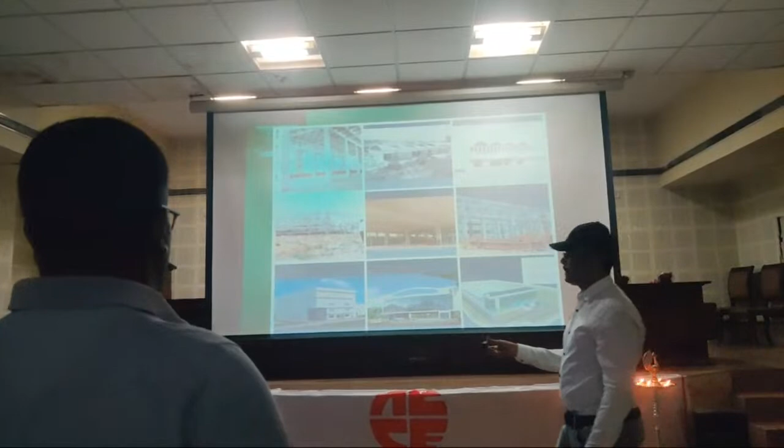Hello everybody, good morning to all of you. At the outset, I am carried away by this Kakinada Center.

Actually, I am one of the founders of this ACCE, and I could never have imagined in 1985, when we formed this association, that we would have such luminary centers all over India, consisting of so many people who are luminaries. So first I'd like to pay a salute to whoever coined this center and merged it with ACCE. Welcome to ACCE.

A word about how ACCE was formed: there was a Gangaram building collapse which happened in '83 in Bangalore, and 9 of us joined together. Most of the time, I feel all of you should also do this - when there is a failure, make your own investigation. 3, 4, 5 people just get together, not to find fault with what has been done, but to take lessons from what has happened and come back and share it with everybody. Because it is not a question of one being superior or inferior, but the whole fraternity getting a bad name.

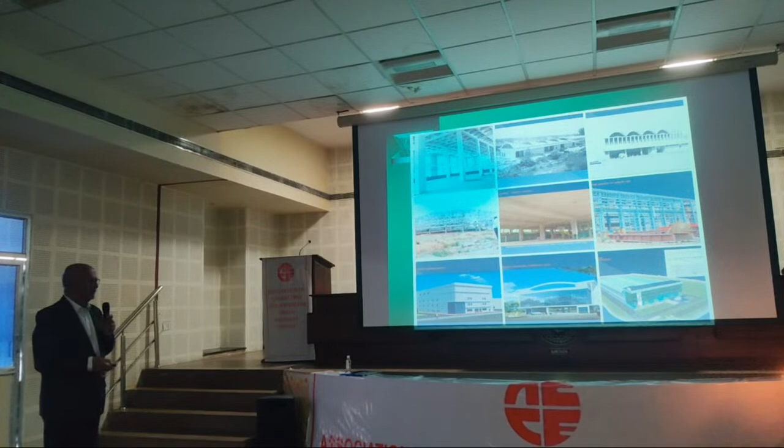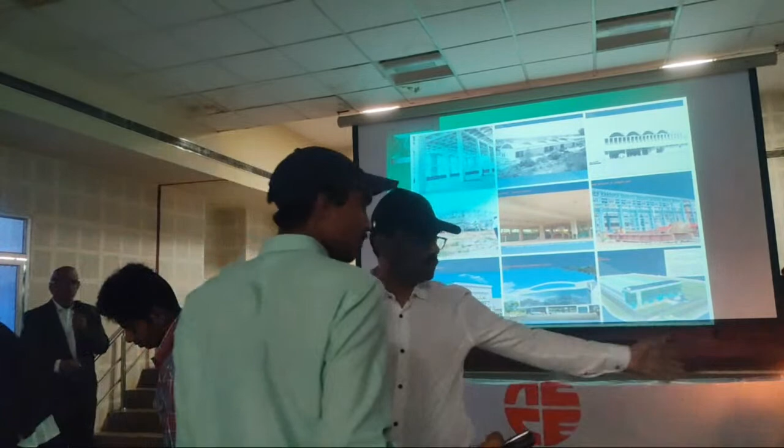This is the powerhouse that I did for Almatti Dam people. This is an industrial building with high, heavy-duty racks, 8 meter high, 10 meter high, etc. for an MNC company - this is a factory for Jyoti Laboratories. They had built 5 factories before, and they came to me that I had to just repeat one of those factories in Bangalore. I told them I don't repeat - I will be starting from scratch as though I have not seen any of your 5 buildings, and then I will do it. And I did this job, and later it was told by the chairman that I have done it to international standard. But imagine how much work I might have done.

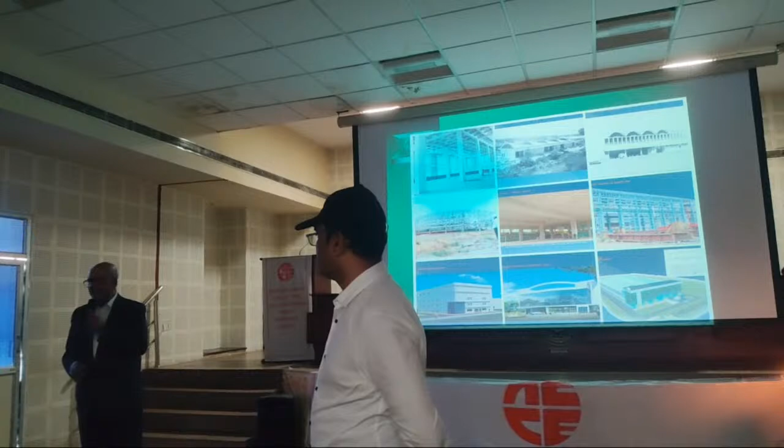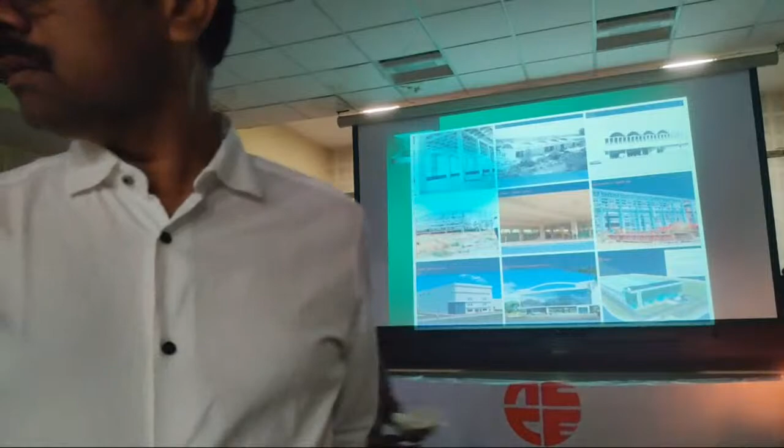So all of you have to do work, and there is a saying, if you want me to tell you, that in the 21st century, to be where you are, you have to keep running. To be where you are itself, you have to keep running, let alone taking it forward.

Okay, I will just run through my program a little fast because I have to cover a lot of subjects. So whoever is having anything to say, we'll say it in the end. You can ask me any question.

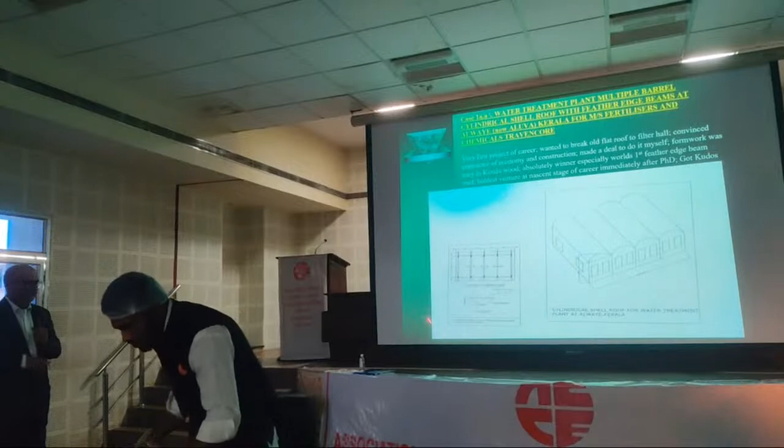So now I come to the point where the innovation came. Here is the innovation. This is a curve, can you see it in the end? Yeah, okay, this is one shell. These are all curved shells. This beam, all these beams, would have been very deep, 4 feet, 5 feet deep. So what I did, I had studied this in shells, that when the curve comes like that, this part can be the beam. So I put this particular feather edge beam, cylindrical shell for a water treatment plant, with feather edge beam.

This was the very first project of my career, wanting to break old flat roofs with a filter hall, convincing the contractor of the economy of construction, and making a deal to do it myself. Formwork was easy in Kerala, and in Kerala wood is in their blood, they know what to do with wood. So I told them the formwork can be made in wood easily, and he agreed. Most people agreed, absolutely a winner, especially the world's first feather edge roof.

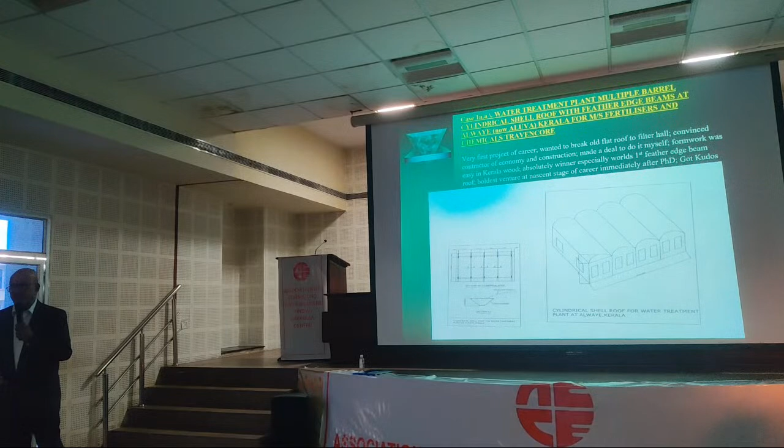Then I was told this was all in theory in the books, had not been done anywhere in the world. There's a theory, somebody had done research that it can be a feather edge. So I told my professor who taught me shells, and asked him, is it that I'm the first person to do it, or are we the first persons? He said, I think so. So that's why it came to be maybe the boldest venture at the nascent stage of my career, immediately after my PhD.

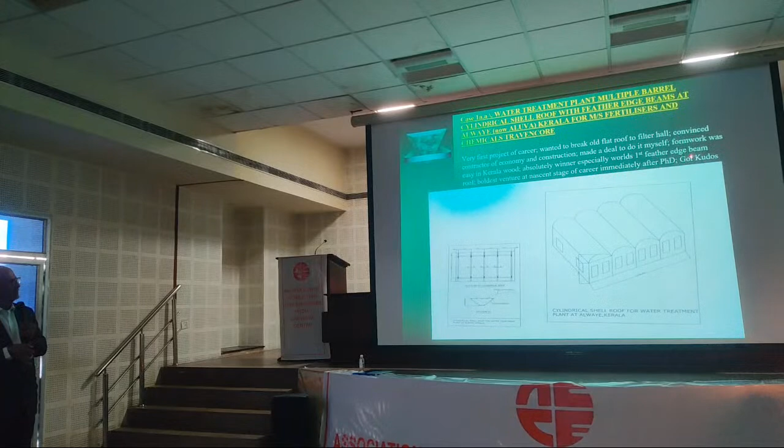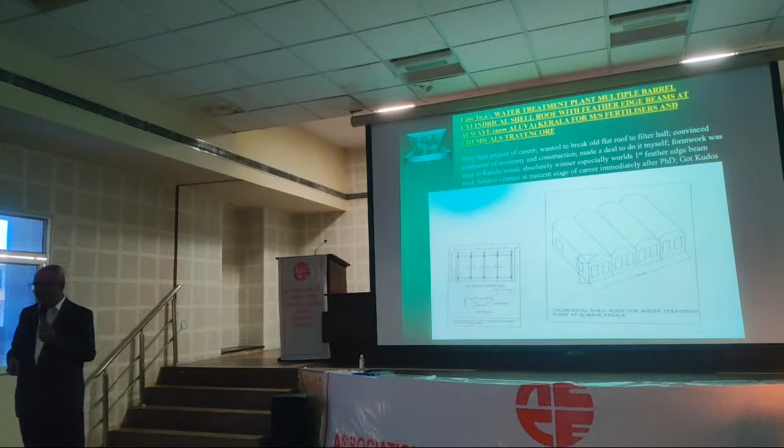So you see, the thing is the boldness. I'm telling you all this because many people are working on different projects. That boldness you must have. It's not that you bluff people, but you have the boldness. Go to libraries, study all that, then be ready for whatever it is, and improve efficiency from 50% to maybe 75%, then you take up all this. Otherwise, you will not be able to do this.

That was the first shell, and it was in 1988 or something. It is the confidence level you have. Yeah, not only confidence, it's all teamwork. See, you know better about formwork, I know better about design, he knows better about architecture, something like that. All of us put together: what he doesn't know, I try to make up; what you don't know, I try to make up. Don't say I did it, we did it. It's that sort of situation.

Now, this is avoidable bad experience. When I did the project, I had a lot of bad experiences. I'll just go through that for the benefit of all of you. See, the site group was not bothered about reading the important aspects of construction given in drawings, such as centering schedule, concreting schedule, and decentering schedule, which would have been calamitous. See, I issued the centering schedule, then I gave the concreting schedule. In those days I was really efficient. That's why I said we are 35%. I gave all of that in drawings.

And the people at the site said, is this all required? What is this concreting schedule? Why do you need it to put concrete? Just pour from the bottom and go to the top. I said, my God, you are at a different level. You better follow this. You have to be strict. You can't be lenient and say, do chalta hai, do whatever. You have to be strict. No, you better follow this, or I'm leaving this site and going. You've got to be that way.

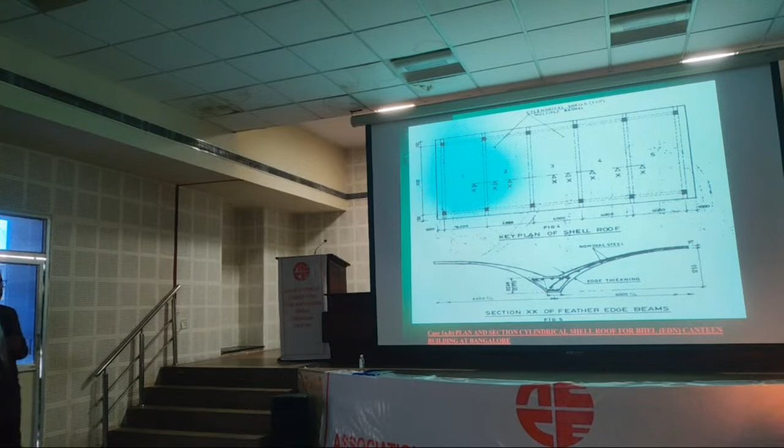Yeah, and there is that, again, feather edge beam, and we have done things like that. So, okay. Now comes, after this, don't get bored of shells, because they told me one part should be on shells particularly. So I put everything on shells in one part. You'll get other interesting things after. This is not interesting to you.

But remember that there is something called funicular shell. Okay? I don't know how many of you know this. So when I went to SERC in Chennai for a seminar, I heard what research they're doing. They have contemporary trends, no? They told me that they're doing some research on funicular shell. I said, Professor G.S. Ramaswamy, he was the man who initiated this thing, funicular shell.

Because funicular shell is the reverse of a catenary. A catenary is the shape of a rope. If you let it hang, it will be totally in tension. If you invert it, it will be totally in compression. So they devised this funicular shell to be totally in compression. So they said it can be done, because this is an Indian, what shall we say, patent. Okay?

So then it was proposed to construct a large multi-storey stores complex in BHEL, a central stores complex. At the concept stage, we discussed what could be done differently. I said it's a large area, flat roof, on a 7.5 meter by 7.5 meter grid or something. What are we doing? Simply pouring concrete left, right, center and using a lot of steel? Why not do something different? What can be done? Each bay you can take a funicular shell.

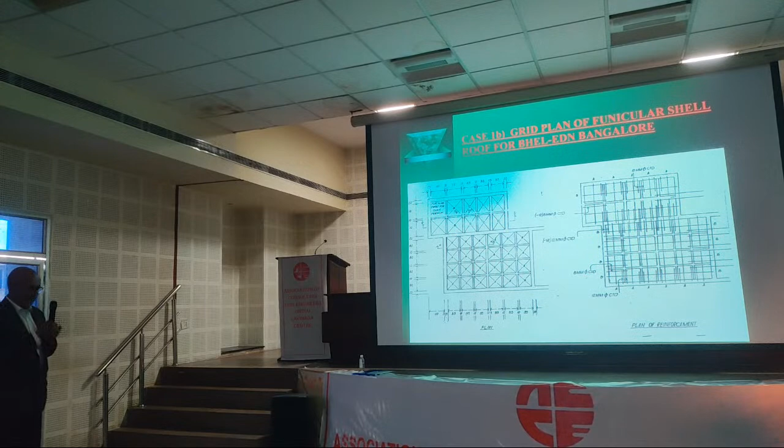This is the plan. These are all individual funicular shells, and that's the beam grid. There you see the beam, the lateral beam. These are the columns, 7.5 meters. And you see the amount of concrete that you have to pour. This is only 25 mm thick on top. This is the skin reinforcement, and wherever there were cranes, I put a double layer. I'm just showing it so that you will understand how easy or how difficult it was.

Now come to the test part. They wanted a test, and they said you should be here the whole day during the test. Those were the conditions they put. We offered a testing apparatus. No, we want you to be testing. I said, okay. So we put masonry all around, put the shell there, and put sandbags on top.

All the officers and staff of BHEL would not come below this. They were all standing 50 feet away, thinking it's going to collapse on their heads. And me and my assistant were going below it, trying to see what the cracking load is, when the shell would crack. So those fellows said, you fellows have got guts.

Your heart is very strong. You won't come in the bottom. Then 100. We were supposed to test, as per IS, 25% more. Then 125% is what it's supposed to take. I said, don't stop, I want failure. So we went on and on and on.

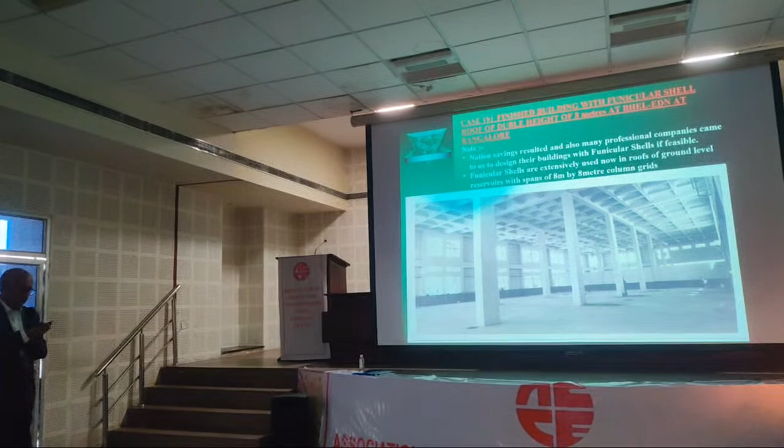Funicular shells are extensively used now in roofs of ground level reservoirs in spans of 8 meter by 8 meter column grids. I don't know whether people notice, who do underground tanks and things like that. When it comes to the roof, we all do funicular shells. 8 meter by 8 meter span, not 1.2 meter, 8 meter. So that's the way it was. Okay, those are the two shells on the paper. The last one is the conoid shell which I presented.

I don't know how I'm doing on my time. So let me give you a little warning. After I think two panels, I will stop. I will give the presentation continually. Shells are finishing up. This is a conoid shell.

So then we got a spares module, stores module in Wheel and Axle plant, now called Rail Wheel plant, in Bangalore. So then they said, what can you do? I said, we can put a Northlight conoid shell. Then the general manager there was actually from IISc. So he turned over and said, this guy knows what he's talking about. So that was a bonus for me. Then he said, is it suitable? I said, yeah, why not?

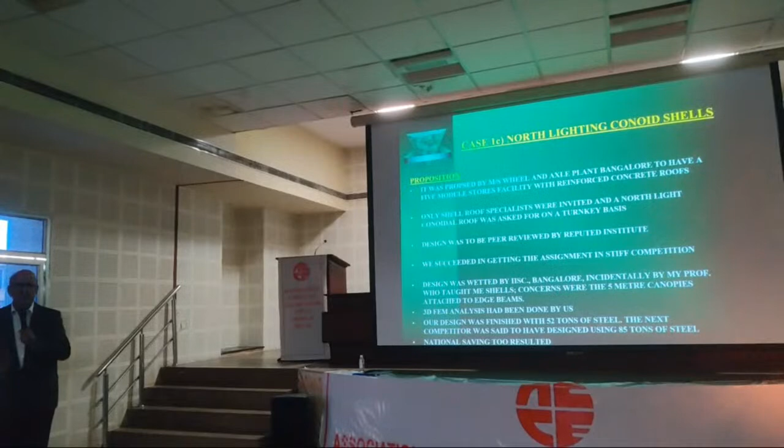So it was proposed by Wheel and Axle plant to have a 5-module stores facility with reinforced concrete roofs, all flat. And then they had 5-meter cantilevers, or canopies, combined with it. Only shell roof specialists were invited, and a Northlight conoidal shell was asked for on a turnkey basis. Because I had shown them this Northlight conoidal shell photograph, they told other consultants, we want Northlight conoidal shell. So another fellow took boldness and quoted for that, and I got the job.

Design was to be peer reviewed by a reputed institute, and here comes the thing. So they say it has to be peer reviewed by IISc or IIT and all that. I said, I have no problem. We'll do it at IISc. And whom do I go to? The professor who taught me shells. He is going to approve my shell roof. So he turned around and said, oh, you are a bold chap. You have a 5-meter cantilever canopy coupled to the stiffening edge. How is it possible? Sir, I have done finite element analysis of the whole thing.

I have done 3D. Sir, the 5 meter was also included in all the analysis. The edge beams have all been checked for that. Told in Kannada, convince them about it. I don't know whether you know Kannada. You say something and convince everybody. My own professor, I said, sir, you taught me shells, but I am telling you that I have done it. If anything is wrong, you tell me. He referred it to the finite element group, and they said, this is fine.

There's no problem. Then he said, the edge beam of the shell will have some effect on the shell. What have you done for that? Sir, even beyond finite element, what do you want? I've done finite element with the shell, with the edge beam and with the canopy. Then I was just thinking, I said, if you want, I'll thicken the shell at the bottom, such that the edge disturbance won't be there.

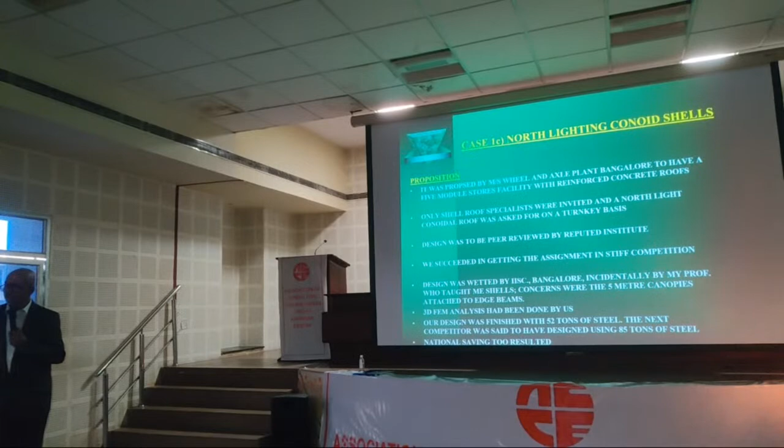Then they put a condition in the work award. They said 52 tons of steel must be used. If anything more is to be used, you have to pay from your pocket. Anything less used, you have to give back to Wheel and Axle. I said, what sort of contract is this? And they said, sir, our auditors are insisting because somebody is telling them it needs 85 tons of steel.

I was shocked to see somebody designing with 85 tons of steel. In fact, I had got 49, and I had made it 52. I said, okay, 5% more. So why should we give back steel to those people? And we got the job. National saving is the result. What's the net result? From 85 tons, the job was finished in 52 tons. So, that was the north light shell.

This is the shell roof with the north lighting. There you go. That's a beautiful module that we did. And you can see the 5-meter canopies on both sides, because this is stores.

Now, for the people who want to work on shells, you may say Ram Prakash said shells can be done, but don't start getting into shells immediately. That's something you should keep in mind. I'll just put it such that it will be useful for you. Okay, what's the definition of a shell?

Singly or doubly curved, thick shell or thin shell. If you make the shell too thick, you have to take the thick shell theory; the thin shell theory will not do. An example of a singly curved shell is the cylindrical shell. Doubly curved is the hyperbolic paraboloid. Simpler forms are made using straight line generators. Ease and saving of formwork is the key. The major thing is the formwork. Analysis varies with use of membrane theory as well as bending theories. An efficient structural form due to its geometry.

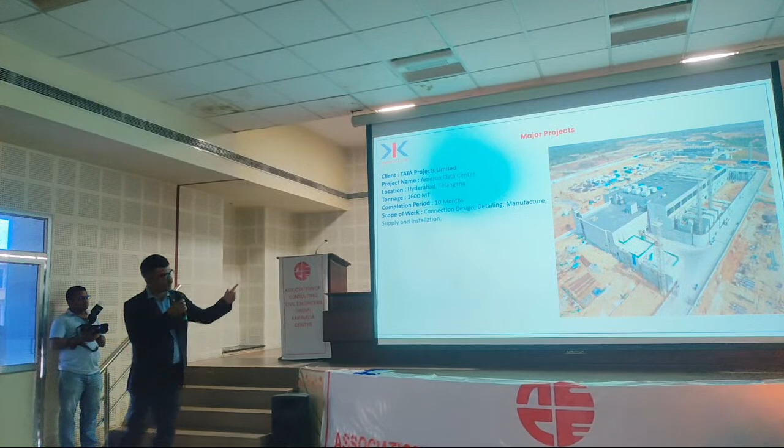This is for Amazon data center, done through Tata Projects Limited. It is nearly 1,600 metric tons. We did this project during the second wave of COVID and completed it within 10 months. It is one of the milestone projects for us.

This is for Aparna Infra Housing Limited, done at Trian roof, approximately 800 tons. This is for Rain Carbon in Vizag, a 400 ton building, completed within 4 months.

This is for Eastern Film Tech, which makes polyfilms. This project is 2,100 tons, completed in 11 months, even including the second wave of COVID. And this other one is 350 tons, completed in 4 months.

This is for Procter and Gamble, approximately 150 tons, completed in 4 months.

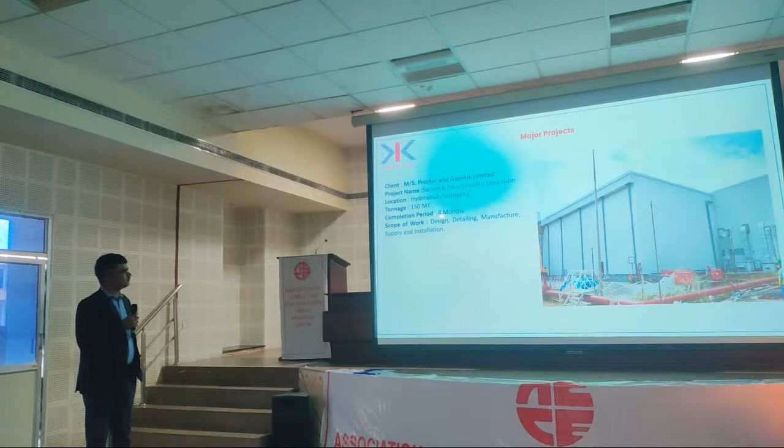This is for Chiripal Polyfilms Limited, which is 250 tons. We completed this in Hyderabad in the record period of 5 months.

This is for Vijay Polyplast, 380 tons, completed in 4 months. This is for NCC Crowns, 350 tons.

This is a library building we did in Jamshedpur for Manipal Tata Medical College, through Tata Steel.

This is one modern rice mill, which is 100 tons. We completed this in 2 to 3 months time.

This is for Rythu Vedika, for the Government of Telangana. We built 252 buildings of 10 metric tons each, erected across the state of Telangana within a span of 3 months.

And this is for Vedaganga Seeds, a 100 ton project.

This is for Tata Advanced Systems Limited in Hyderabad, which is 200 tons.

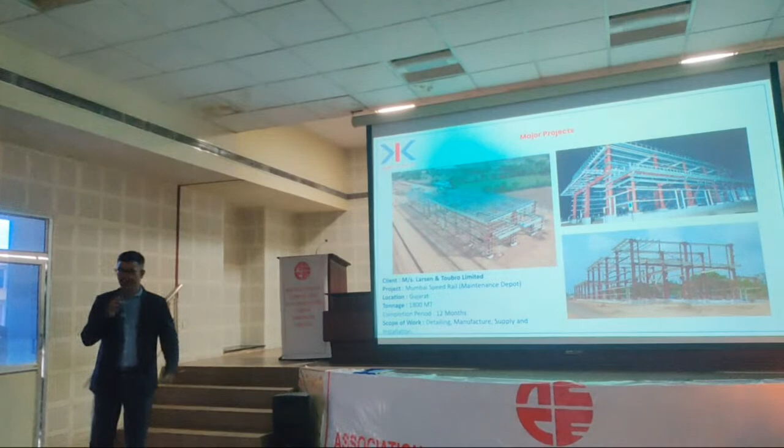This is for the Ahmedabad to Mumbai L&T Bullet Train. We got 6 depots from L&T, and we have already completed all the depot buildings. After that, we got 2 more station buildings, around 2,200 tons. Those are now at an advanced stage.

This is for Fab Industries, a warehouse project in Nashik, Maharashtra, which is 750 tons.

This is the Tata Technologies ITI workshops for the Government of Karnataka. These are nearly 100 buildings of 20 tons each, erected across the entire state of Karnataka within a span of 3 months.

This is for KBK Chem, a raw sugar warehouse for Renuka Sugars in Haldia, West Bengal. The critical part here is the slope is different, not a normal slope like 1:10 or 1:20, but nearly 1:5 or 1:4. This was completed in 45 days.

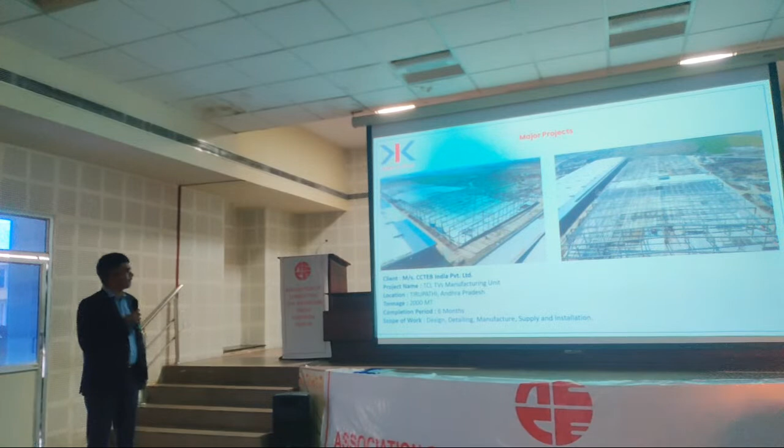This is for TCL TV manufacturing in Tirupati. We did this for CCTEB India Private Limited, around 2,000 tons, and erected this project in 6 months.

This is for Coca-Cola, Hindustan Coca-Cola. Through Ratna Constructions, we have done this, nearly 850 tons, in Odisha.

And this is for Varsha Food Park, Sri Varsha Foods in Tirupati. This is for TCL TV, the first unit we did for TCL TV manufacturing. This is for 3F Industries in Krishnapatnam Port.

Likewise, CPF India Limited in Erravaram is 550 tons. And this is for Ilios Breweries.

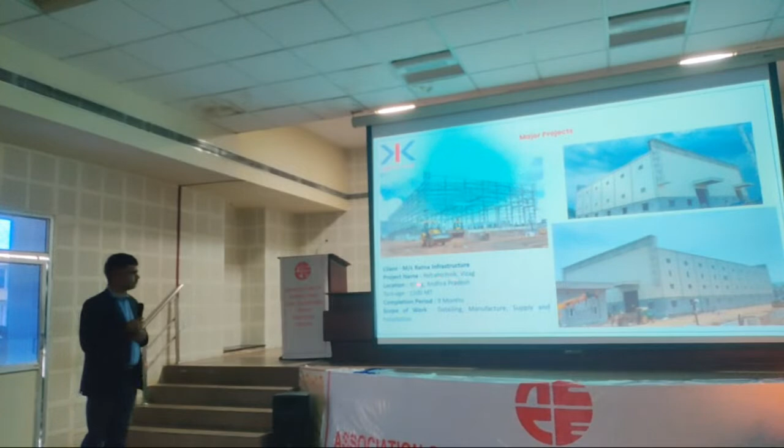This is one of the landmark projects for us in Vizag. Through Ratna Infrastructure, we did this for Refratechnik, a German company. The project is 1,100 tons, and we have completed it, nearing completion, about to finish within 9 to 10 months.

This is for Chiraharit Private Limited, a warehouse of 1 lakh square feet in Vijayawada, already completed, around 400 tons. We completed this in a span of 7 to 8 months.

And these are the few new projects awarded to us recently. One is from JK Paper, which is 350 tons in Telangana. One is for Century Panels in Kadapa for 350 tons. One is JSW Cold Shed and Warehouse in Bangladesh, 330 tons, and Amara Raja 1000 tons in Hyderabad, which is a warehouse project. And this Navi Mumbai International Airport, recently we got one building in Terminal 1, which is 2200 tons. And one for PNG in Delhi is around 300 tons.

And one is Microsoft India. This is the largest project we received recently, 4000 tons. And this is for Mumbai Speed Rail, the bullet train, where we received station buildings. These are the on-hand projects recently.

And this is the sample 3D model of the Microsoft India project, which we have developed in Tekla.

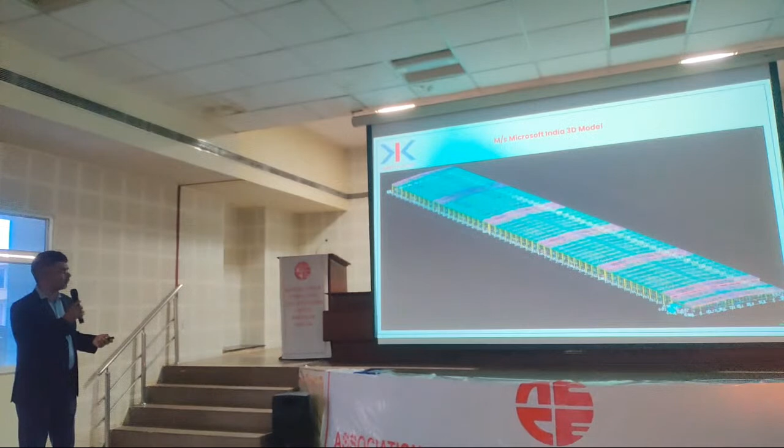Go back. So you can see all the box columns. The size of the box columns is 1.2 meter by 1.8 meter, and each column of 12 meters is 18 tons weight. You can see the slot, the gap, where people used to enter into that and weld some stiffener plates inside the column. So it was a very tough job for us. And we did this project during the first wave of COVID.

Available in a range of 0.9 mm to 8 mm. Kartikeya offers the best roof sheeting solutions in this part of the world with long-lasting materials and immaculate quality. Made from high-quality materials and available in bare galvalume, color-coated galvalume, and color-coated galvanized steel with thickness ranging from 0.47 mm to 0.6 mm, they are designed to render an aesthetically attractive disposition. An impressive range of roofing accessories complement the roofing sheets.

A quality composite deck sheet. Top deck is a steel profile with ribs and embossments, which helps in binding with concrete slab and together forms part of the floor structure.

It is a matter of great satisfaction that in a short span we got recognition from the Indian Railways for manufacture of stainless steel coaches. The Indian Railways are modernizing the railway tracking, railway coach system, and bogie system for higher safety and higher comfort of the passengers. In that direction, we have put up a modern facility for manufacture of railway coaches, including the underframe parts, and we have been among the top 10 for manufacture of railway coaches.

From manufacturing parts of railway wagons to developing unique requirements for rail coaches, the railway solutions are delivered under the watchful eyes of Kartikeya's visionary leadership.

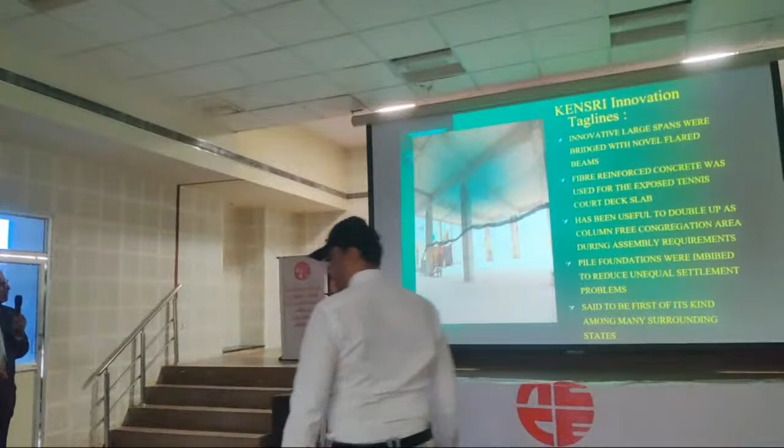Sir, I got one question. Yeah, sure. There you have taken 2 columns, and this side only 1 column. Which side? That's only 1 column, sir. This one? No, this one is in line with this column. Not 2 columns.

Okay, that was that school. So you got a hang of large spans in that. Now the next one I did was a production building for one of the MNCs, at Kakinada. This production building had a hall, 60 feet by 40 feet, column free in one of the modules, and on top there was 12, I think,

production building with multiple floors, all of them with machinery. There were heavy duty reactors of 12-ton capacity, 7 in number on each floor. So you have rotating machinery on each floor on a column-free hall. The column-free hall is 60 feet by 40 feet for all the floors.

All high floors. Now in this column-free hall, the client started asking that the columns be parallel to the walls, not projecting into the building, because it's a pharmaceutical company with clean rooms. I said, if you want that, it will be costlier, but we can do it. So I went in for PT slab. Otherwise, we could have been projecting inside or outside.